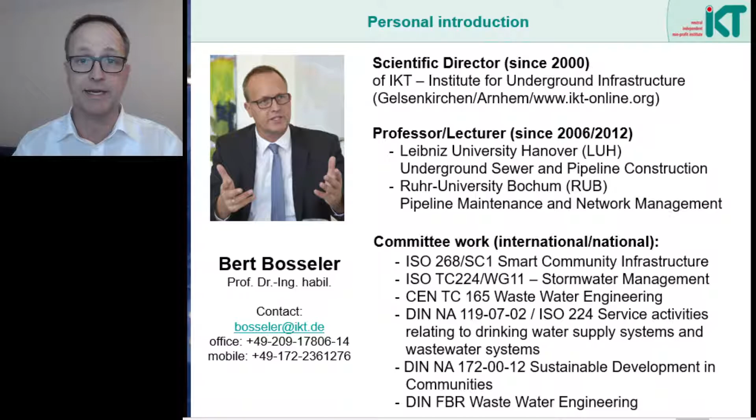So you may ask, where is IKT, my institute, located? Well, it's just north of Africa, west of Russia, on a small peninsula. We call it Europe. Many funny languages are spoken on this continent. However, I will try to do this seminar in English so you can better follow my words.

And with that, I would like to start my introduction. First of all, there is the question, what exactly is the IKT? And what are the Institute's main focuses? Because much of the content of this seminar series is based on experiences that we have made at IKT ourselves or together with partners in our IKT projects.

The second question is then, what do we actually understand by the subject area sewer and pipeline construction or pipeline engineering? Is it just about laying pipes, or is there perhaps more to it? Yes, and finally we will ask ourselves beyond the basics, which questions are of particular interest to us, both in terms of engineering and economics. But let's start with IKT. Let's take a closer look at our institute.

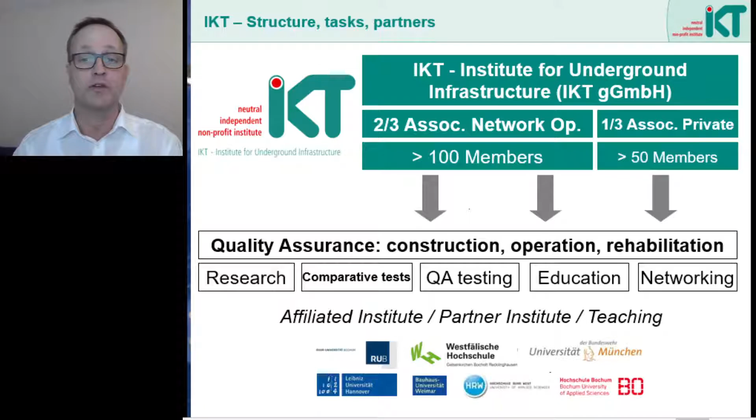In addition, we are an affiliated institute of the Westphalian University and partner institute of one of the universities in Munich. And in teaching, we also cooperate very closely with other German universities, such as the University in Hanover, the University in Weimar, and the newly founded Ruhr West University of Applied Science. The IKT was founded in 1994.

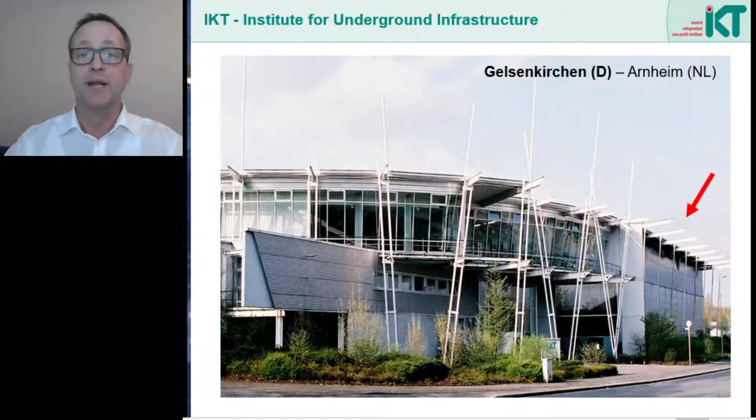And here we see the headquarters in Gelsenkirchen, Germany. It consists of offices and event rooms, but also, and this is the special thing, a large test hall right next to it. This means that when we research and test, our employees, our partners and clients can always experience this at first hand. Events and discussions can thus be directly combined with practical impressions from the test hall.

You can see an impression of this technology here. The concept is we want to recreate everything that happens underground on a scale of 1:1. And a lot happens underground, both during construction and maintenance of the sewers and pipes. There are countless interactions between the ground, the components, the groundwater, and also the roads and the traffic on the surface.

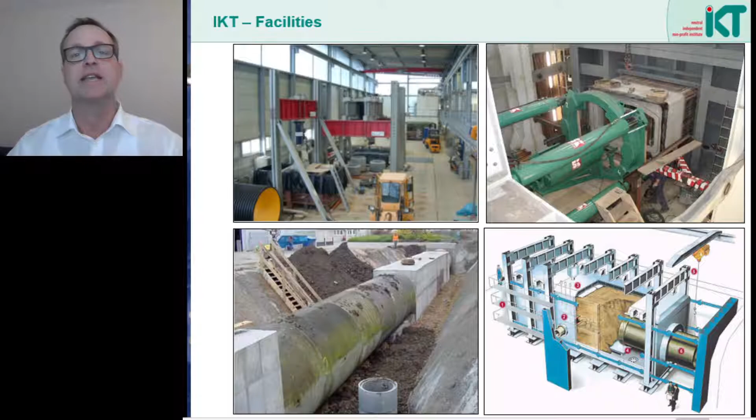However, the whole thing not only affects the construction but also the operation of the networks. Below left we see a large diameter pipeline that was installed on our IKT site. Today a dam made of various types of soils lies above it, and in this section we are testing inspection technology, we are also testing, for example, other techniques to determine the condition of the pipes or the condition of the soil during operation. So we can see that practice is the main focus of our IKT. Science and experimental technology are just the means, but practice is the end of our projects.

And of course, we continue to develop our testing technology. Current problems such as climate change and heavy rainfall also require new infrastructure solutions. We are therefore currently building a new test facility with which heavy rainfall events can be simulated on a scale of 1:1 over an area of 200 square meters. We are interested in runoff formation, runoff concentration, and what the underground technical facilities can achieve to manage possible flooding problems. This includes, for example, drains, gutters, shafts, manholes, pipes, and water-permeable pavements.

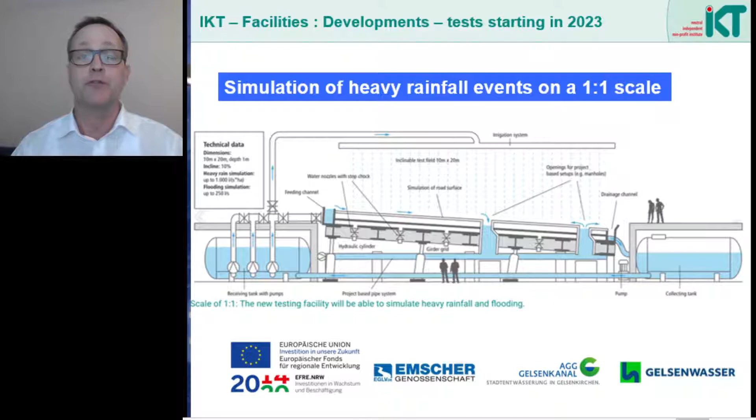And the facility that you can see on this picture is primarily a new efficient research infrastructure. What we are going to research and test with it depends on the future questions and problems of the network operators. And since we are oriented towards the general good, you will find many of our results as free downloads on the internet. Typical examples are our product tests, our quality reports, and of course all our research results. We always try to get the release for publication of the results from our clients, and especially the federal, state and local authorities are very open and happy to do so.

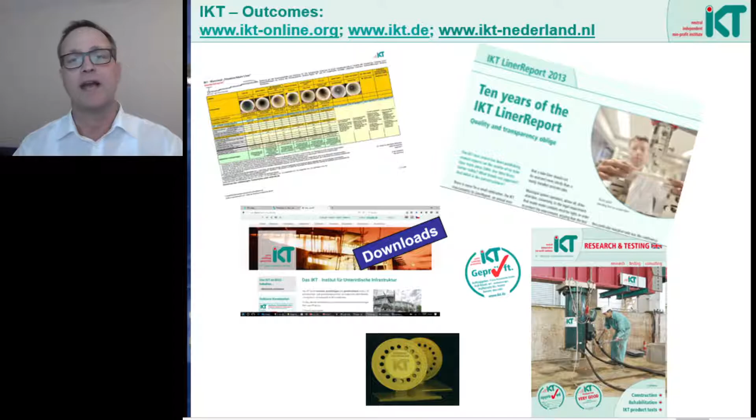Once a year, we also award a prize for special achievements of the municipal network operators. It's our golden manhole cover, which you can see here on the bottom left. So if you or a colleague is responsible for a municipal sewer system, and if you have set up something particularly innovative and citizen-friendly, go ahead and apply, wherever you come from.

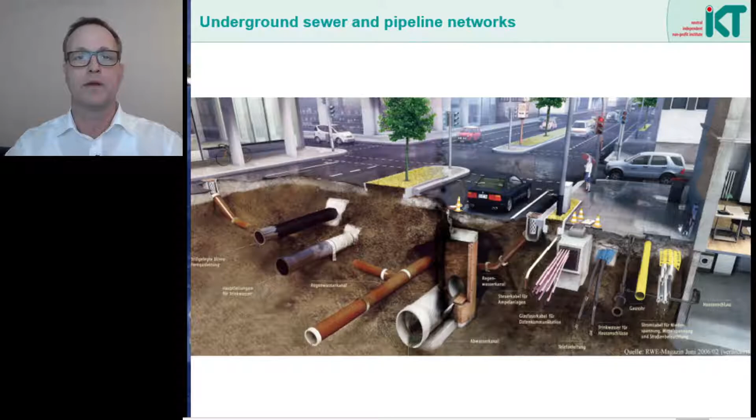Now we come to the actual topic of this seminar series, sewers and pipelines. Here we see a view of our city, not only of streets and buildings, but also of the area that interests us most in this seminar, the underground. Almost our entire supply and disposal infrastructure is located there, under sidewalks and under streets. And this example shows how a large German utility company, for example, imagines it. We took the picture from a company magazine with the kind permission of RWE. But we changed the picture a little. We added the trees in the middle afterwards.

What we see is a whole collection of underground sewers and pipes. There are yellow gas pipes, water pipes, electric cables, and even the telecommunication cannot be missing. In the middle of the street, the large rainwater collectors and the sewers are located at great depth. And on the left, we see more main pipes for drinking water and gas. And all these pipelines then have to have laterals to be routed into the houses on the sides. And then under the crossroads, it also gets really narrow, of course. This underground space in our cities with all its sewers and pipes is our topic.

How can we build such an infrastructure? How can we operate it? And of course, the big question, how can we maintain or even renew old structures? We want to address all of this in our seminar. In particular, we will deal with technical questions. For example, what pipes and construction methods are available? How can we dig a trench? Or how can we build and renovate without trenches? But we will also address organizational and economic questions. Who is actually responsible and which procedure is actually economically sensible?

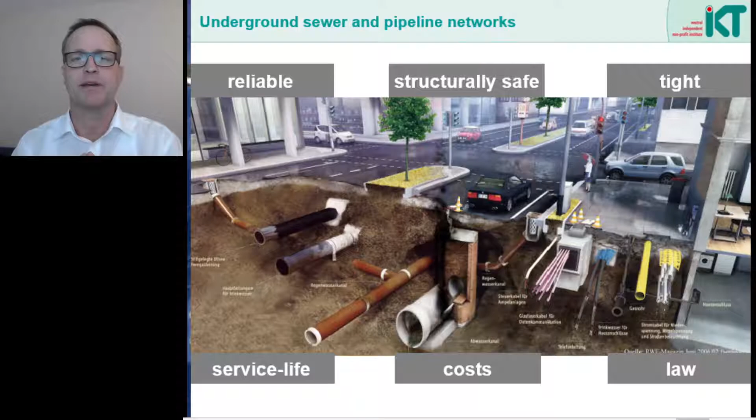And there we are then also with the economic criteria. Also here, three substantial criteria are to be called: the service life, the costs, and the lawfulness. Service life is a very important concept here. Every network should be planned in an economically sensible way for a certain service life. And all technical services must be provided over this lifespan. The costs for construction, operation and maintenance during the service life then play a major role in economic efficiency.

Well, and what role does law play? Well, as external boundary conditions, the legal requirements can have a major influence on profitability. And this can affect all phases of construction, operation and maintenance. Let's just think of the requirements for occupational safety.

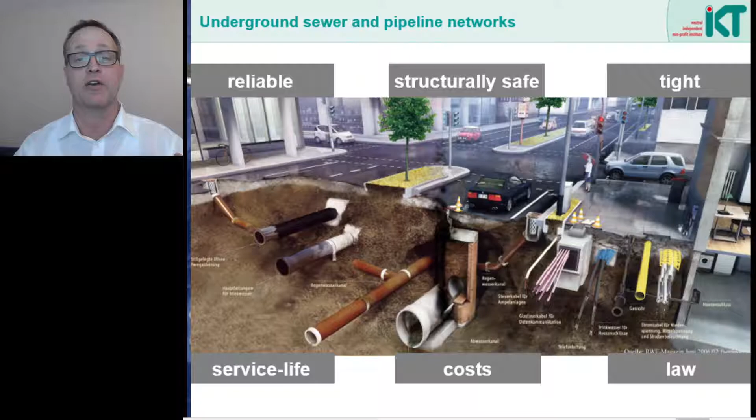In our seminar, we want to keep these things, the technical and the economic requirements, always in mind. After all, everything we do takes place within this framework and is of great importance for life in our cities. In the end, we need a functioning supply and sewer system as part of our quality of life. People and companies depend and rely on it. And in terms of economic efficiency, there are immense assets underground, which we have to take care of.

Some time ago, we at IKT took a look at how these assets are distributed for Europe. The survey was based on published statistics and our own data. Of course, there are also more recent figures, but they are not so easily comparable, so I will stick to our sources here, so still for the EU of 28 members. What is the situation in detail? Well, underground transportation routes account for less than 10% of the total underground assets.

This is certainly below what many people would think, because the use of underground transport is usually an extensive experience. Subways, train and road tunnels are widespread in Europe and millions of people use them every day. However, though the costs per meter of track easily run into the millions, the total construction costs are comparatively low, because the total length is not as high as in the other networks.

The supply networks for gas and water, in contrast, have enormous network lengths. However, for these lines, the construction costs are not as high as for the sewers. Many supply lines are located in the sidewalk area and the installation depths are usually shallow. All these networks do not even reach half of the assets. So, who is the real asset giant here? Well, with a replacement value of more than €1 trillion, that's the sewers.

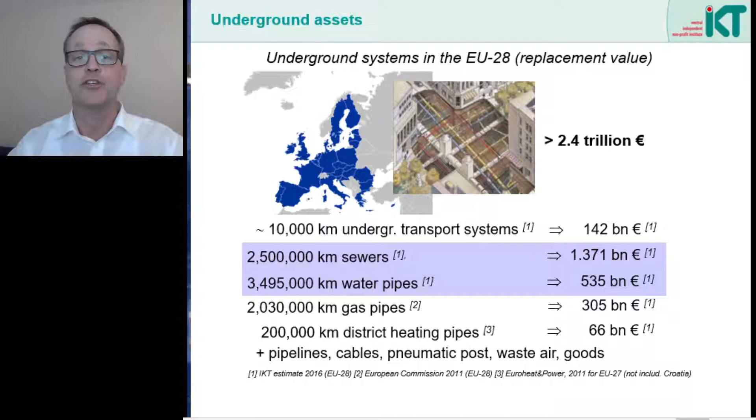However, there are also other networks, transport pipelines, district heating lines and cables. And district heating and cables in particular are growing strongly due to developments in energy and telecommunications. So, what issues and questions do we want to focus on in this series of seminars? Finally, let me give you an overview.

We have already recognized construction, operation and maintenance of the networks as our main topic. The networks must be stable, reliable and leak-proof over the entire service life. And all this at reasonable cost within the legal framework. That applies to every single network. And even more, all infrastructure networks also interact with each other and other structures and other users.

On the one hand, there is the interaction of the overall system of pipes, soil and roads. The whole thing is a highly sensitive engineering structure. After installation, the resulting pipe soil structure must not only be self-supporting, but also provide an even foundation for the road structure above it. We want to avoid subsidence at all costs, and yet the whole thing must still be easily accessible in the future, for example, to make connections or to do any repairs.

And a pipeline, of course, only makes sense if there are connections. How can we make these connections in a reasonable way? Many sewer laterals used to be connected by simply breaking the main line and pushing the connection in. And other connections do not withstand the earth loads and break off.

And that leads us to one big question. How can we repair such connections and all other damage scenarios in the underground without having to dig up the whole road? There are many interesting inspection and construction methods that work underground without trenches. And the quality of this work is also of particular interest here.

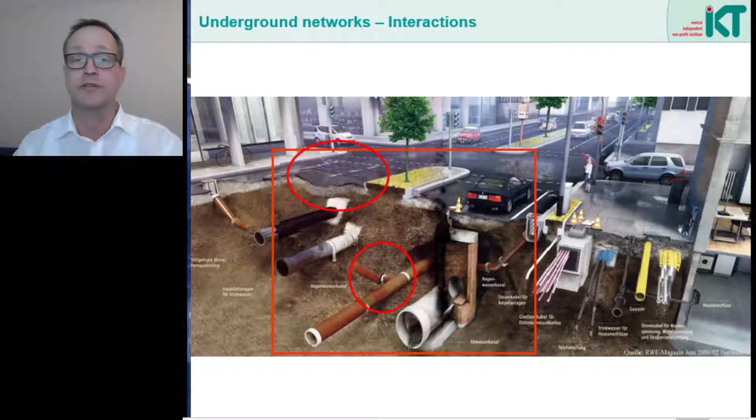Well, and then, of course, the groundwater. Groundwater is not only an external static load for all pipes, it also causes buoyancy. And groundwater can also lead to further problems, especially in sewers. If a sewer is leaking, groundwater penetrates into the sewer and high quantities of water can flow in. And then they overload the entire system. So in combined systems, in the event of rainfall, there is no longer enough space for the rainwater and even backwater can occur.

Well, let's seal the sewers, you could say, but even that is not so simple. First of all, it is not so easy to seal a pipe, for example with a robot, when water is flowing in from the outside. Secondly, new problems can arise. If the sealing is successful, the groundwater level will rise again, and this can have negative effects on surrounding structures. Uplift and wet basements are just examples.

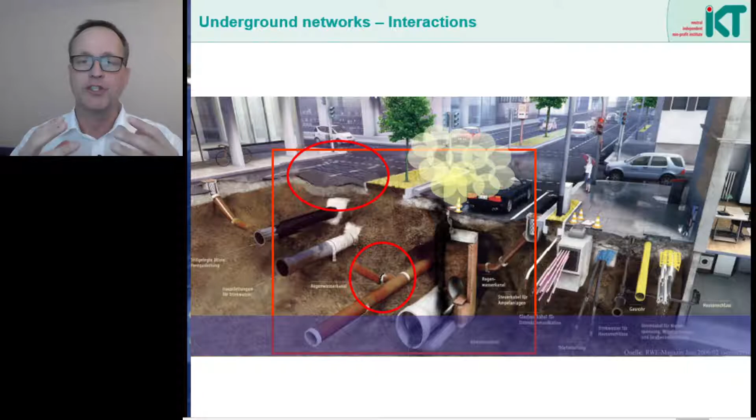Further interactions occur during operation. Sewage or odors can come to the surface from sewers. And there is often an intensive discussion about how sewers and pipes can best be cleaned and operated.

Yes, and finally, a very special topic. There are also many interactions between trees and sewers or pipes. Roots look for space in the underground, and they find it especially in the vicinity of pipes. And that brings risks. For example, roots can pull on a pipe, for example, when wind blows on the tree. Or a root grows into a pipe joint and clogs the pipes.

So we have to ask, what role does pipe and soil quality play here, and how can risks be reduced? And finally, how can we repair damage from root intrusion? And please don't forget, we also need trees in our cities because they are part of our quality of life and help us with heat and other climate change issues. However, we also have to be aware of all these possible interactions, just how we can see it on the next picture.

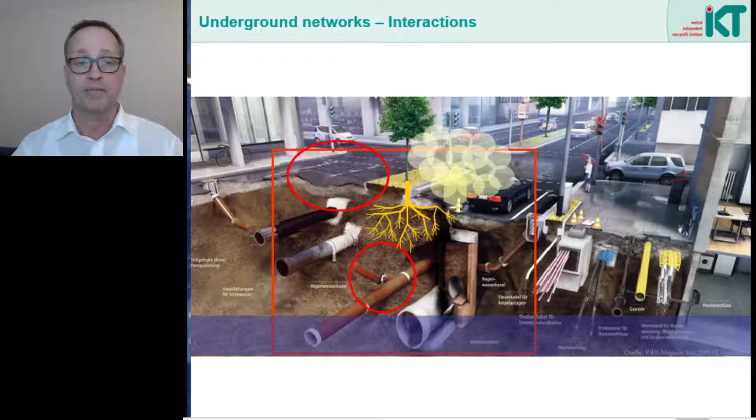Anyone who wants to build or renovate something in the existing underground today will hardly find enough space. Pipes lie crisscrossing the underground, and where there are no pipes, there are roots of trees and of other greenery. And in some cases, hardly anyone knows where all these structures are located. This becomes particularly clear when, as here on the bottom right, a new pipe has been shot through an old pipe. Obviously, when drilling the new pipe, one did not even suspect that there was another pipe down there as well. Such cases are not uncommon, and they go into the thousands.

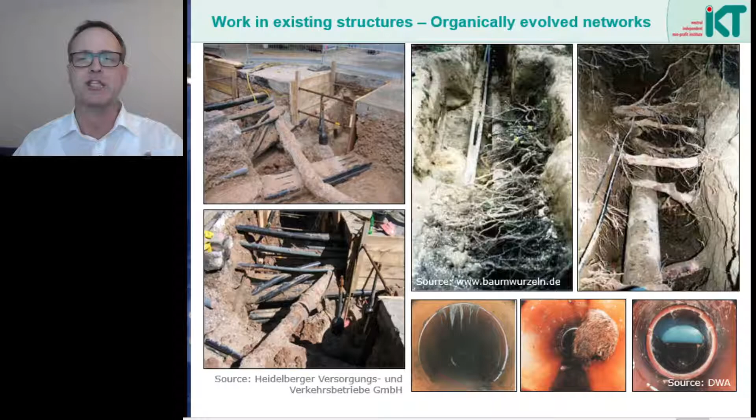And here, of course, there are questions of responsibility, of organization, and of management of the whole life cycle of these underground systems. And in this seminar, we especially want to look at the life cycle question.

What we will look at in detail, that is the products and components we use in the networks. So for example, components like pipes, manholes and connections, and the necessary trenchless rehabilitation techniques, of course. With these components and techniques, we can build, we can operate, and we can maintain and rehabilitate the networks in a reasonable way. And for us in our seminar, we will focus on the quality requirements and the quality assurance that is needed to be successful.

And finally, we will ask what actually happens at the end of the service life. Is what we build flexible enough to be able to adapt to future requirements? Asset management is the key word. That means a real asset management over the entire life cycle. So we see there are many exciting topics which we want to understand better together in this seminar.